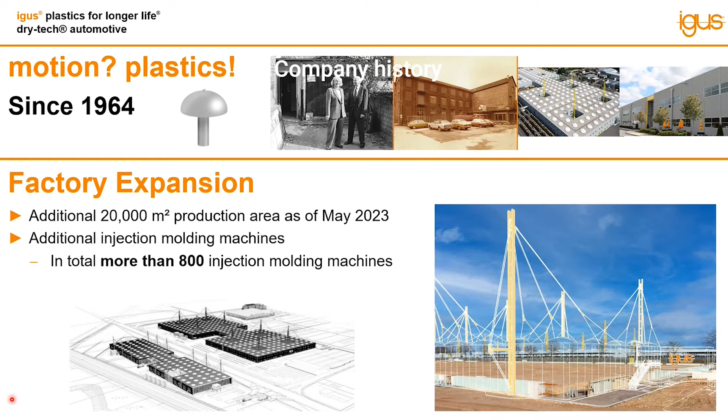Coming from one product we saw on the other slide to many more products in our portfolio, we also offer a lot of cable carriers, and assembled carriers with the cables already included to make it fast and easy.

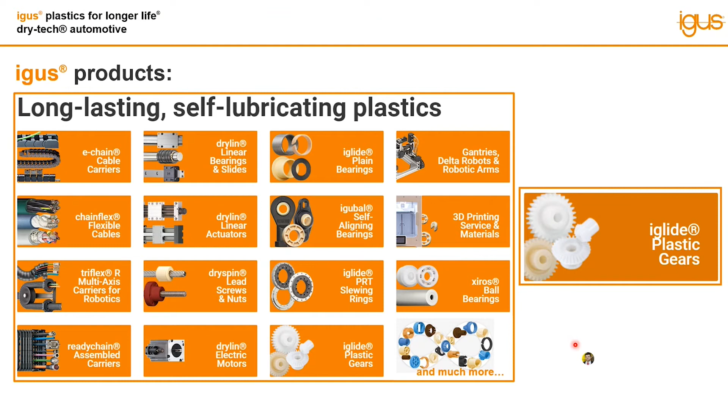And today we will talk mainly about our iglide plastic gears. So what is iglide? Iglide is the material behind all our components, and that's the core technology of igus.

We develop our own tribo polymers. We have over 50 different materials in the catalog we are using, and even more, like over 300 materials, for specific applications with slightly different parameters and characteristics, especially focusing on having answers for the specific application.

So what is inside? Usually we have a base polymer defining the temperature and water absorption as basic parameters, all of them available on the market that we are using. Then we blend fibers and filaments into it to make it more resistant and stronger, with load carrier opportunities, and then last but not least, solid lubricants to make it self-lubricating.

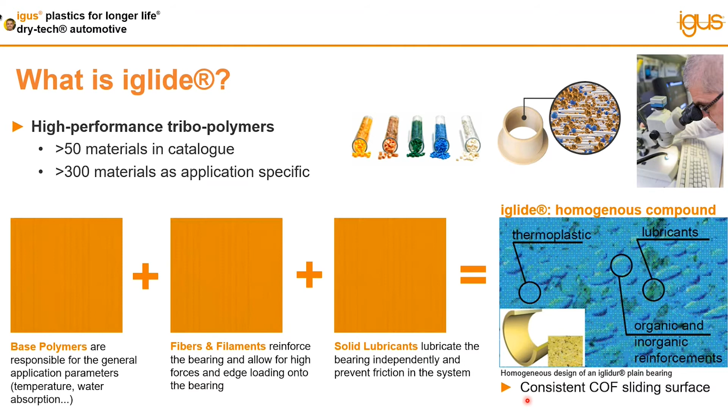All the products we have can run without grease because it's already inside our blended compound materials, as you can see the structure here, always allowing a very low coefficient of friction, a very perfect sliding surface, and very low wear rates for your application.

How do we prove it? That's a big thing for us because we are testing a lot. We are testing all the materials we have, in different shapes and different designs.

Different load scenarios, different speeds, and all of this testing data will go into our online tools. So you can go on our website, fill out the basic parameters, just a couple of data points of the application, and you will get a real recommendation about the best material from igus, cost-wise, but also for service life, to offer you a workable and very good application.

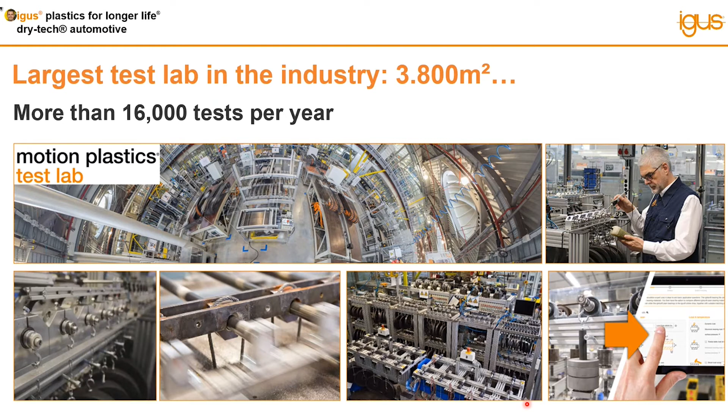And the automotive industry, to give you some confidence, over 1 billion bearing components we produce per year at the company igus, and half of it is going into the automotive industry per year, like 500 million pieces a year we are already successfully delivering into the automotive industry.

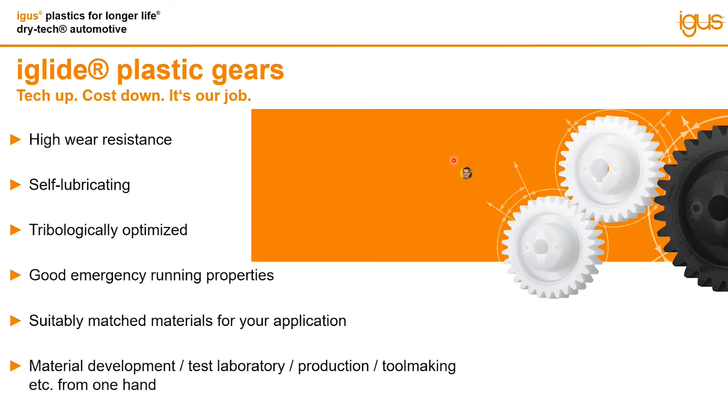This is one target from igus: we want to make all of our materials calculatable for you in different software that we have, and online in our calculating systems.

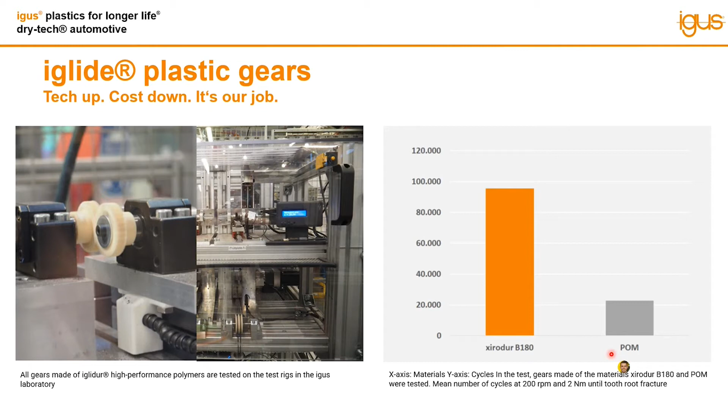This is also an advantage from igus: we are focusing on many branches, so we have a lot of experience and innovation from other branches that we can implement in the automotive industry for you.

This is one very important point at igus - not just the parts we offer, the material, our know-how, but we want to give comprehensive service from one source.

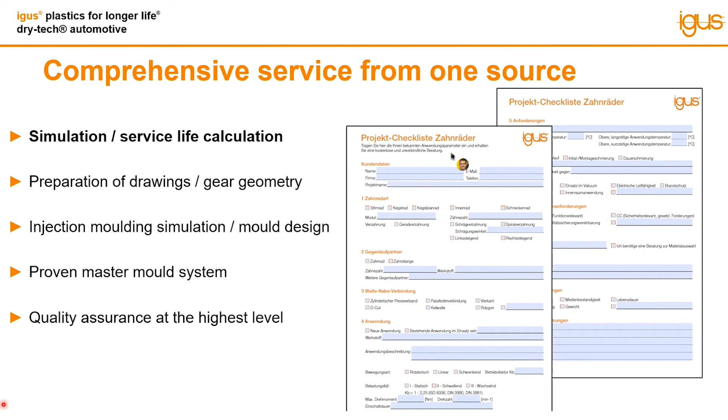So we often begin with a simulation, a service lifetime calculation of your system, your gearbox, your gears. We have a project checklist, a little bit like an APQP, where you put in all your data. Regarding your needs and parameters in the application, we will find the right material for you - this is often the first stage of the project, and this is how a project can start.

People dealing with gears daily in their business know KISSsoft. This is a very important state-of-the-art software that we also use at igus to calculate the gears, to optimize the geometry of the tooth, and to give you a service lifetime calculation for your application - very important at the beginning of a project. This gives direction on which material to use, how long the lifetime is, and what should be optimized, and we provide service regarding all these points.

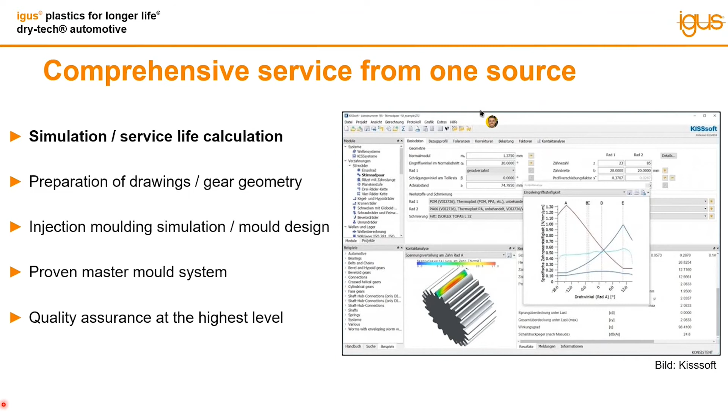One very nice and important point is that from mid-2022, the first iglidur materials will be available in the KISSsoft software, so that if you use KISSsoft in-house, you can directly calculate the first iglidur materials in KISSsoft. This will also come this summer.

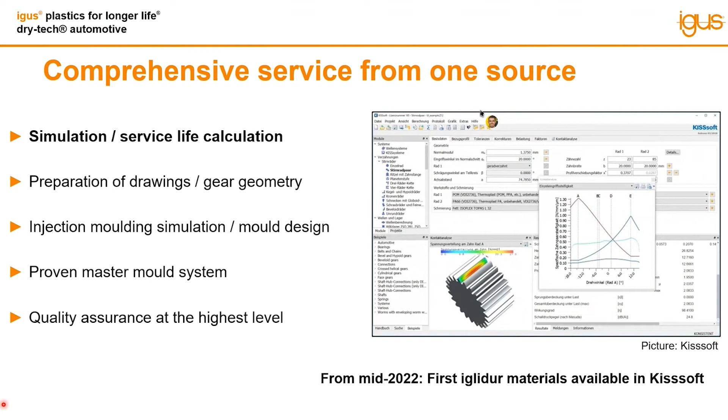After defining the first steps in the project - simulation, modification - this is a good example that we are also your partner regarding the geometry of the parts. We often get a simplified tooth or gear geometry from CAD systems, as you can see here, which doesn't match the norm. As a partner, we will find the right geometry with you, implement the dimensions on the drawing, so that we have the right thermal calculation beside the dimensional calculation in your system. This avoids sticking and allows us to make correction loops the right way, so that everything matches the norm.

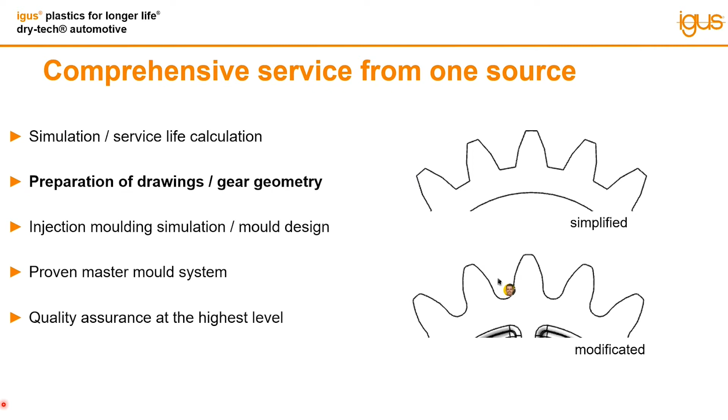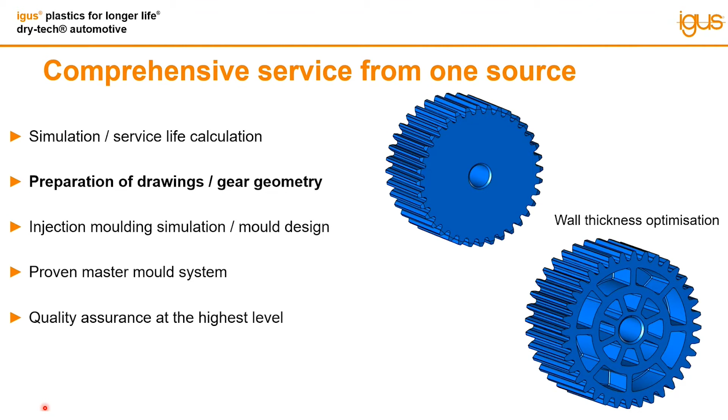Another important point: sometimes we get requests like this - a very high thickness part. It's not just about the teeth or tooth itself, it's about optimizing the whole material regarding injection molding. This is very important at the beginning of the project, because at the end we just want to start prototyping with the serial geometry - we don't want to change the geometry during the project. So we really take care to consult on optimizing the wall thickness, so you have a really good part geometry from the beginning of the project, even if we start with prototypes made out of SLS, bar stocks, or whatever.

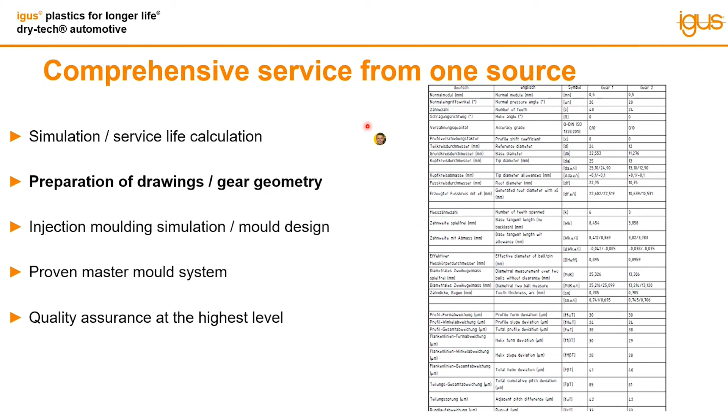As I said before, we define all the important measurements needed to define a drawing, a gear geometry, on the drawing. We have an internal norm table where you can find the root diameter, tip diameter, all the references and dimensions to define a gear and also perform quality assurance. All this is implemented in our drawings automatically, so you have all the details you need at a glance.

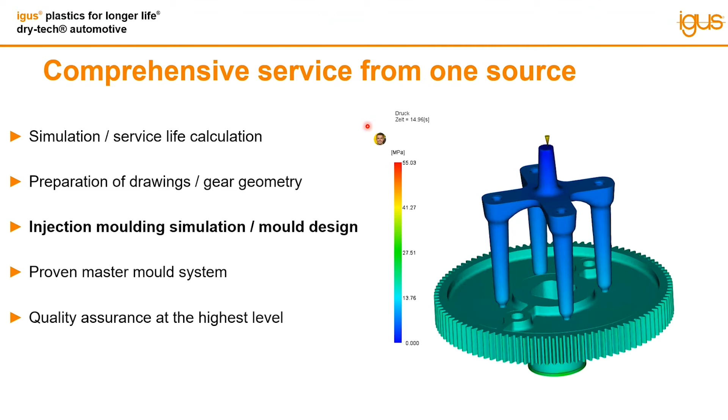Before we go into the steel phase, before we build prototype or serial molds, we take a deeper look into the process itself, for example with mold flow analysis, so you can see how the part behaves in the tool. This helps optimize the part, the gate mark, or the periphery of the tool, to have the best process for your serial parts, because quality is a very big topic in the automotive branch. Here's another view into the mold flow, which is what we can do to calculate the parts from the production side.

When it comes to mold making, going to the steel phase after simulation, we make this in our in-house tool shop, so we have very short ways. We can make the tools and correction loops in-house, and sample the parts directly on our sampling injection molding machines right next to our tool shop. So very short ways, a very short lead time. This is our target, because lead time is more and more important in times like this.

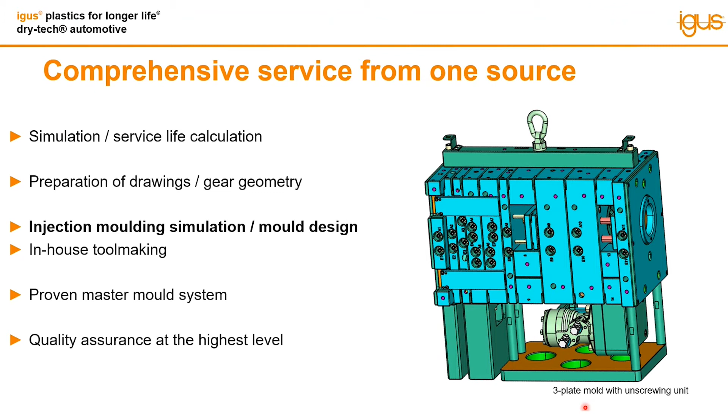We have the sampling process in our in-house technical center, so we have machines where we can take a deeper look into the process. We build the mold, we have the first off-tool parts, and after every correction loop we sample the tools very individually and take a detailed look into the process, so we have a stable process in serial production for you.

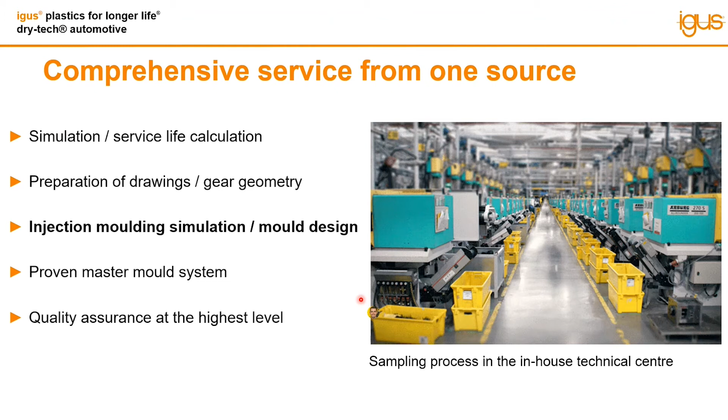Besides standalone, very complicated tools that we need for some projects, we have our proven master mold system, also a 3-plate system in this case. The part I hold in my hand is a module of 1 with 50 teeth, produced with the tool you see here. This is also our target: if we can put your part, your geometry, into our injection molding master mold system, we will lower the tool costs and give you the best suitable service regarding the tooling side and the costs, not just the part price, to keep costs low overall, including the tooling.

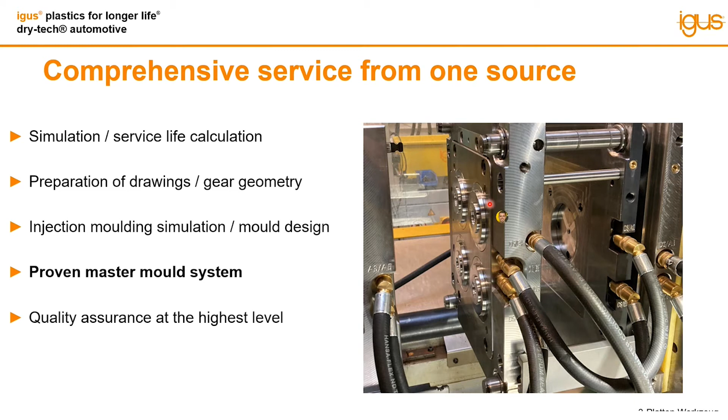One very important, high priority point from the beginning of the project is quality assurance, which at igus is at the highest level, often beginning with CT scanners. Once we've molded the parts, we're able to measure every point on the part, so we can make individual correction loops for the tool. We can take a deeper look at every side, every point of the part, to make correction loops very individually for serial production.

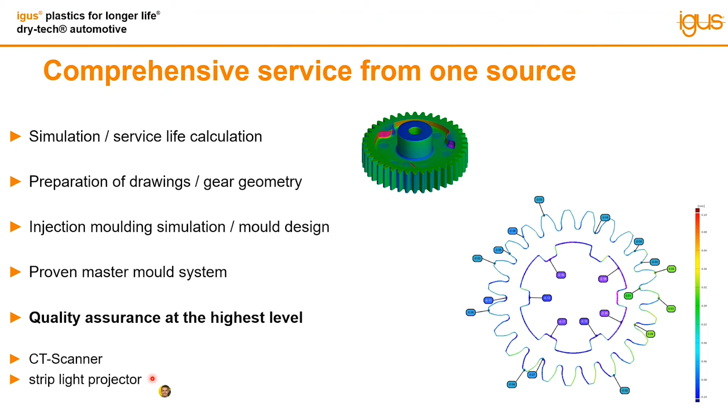At the end, if we have overmolded parts, like metal parts put into the parts, we cannot use a CT scanner. In this case, we have the strip light projector, so we can measure parts with overmolded metal parts. You know these pictures when dealing with gears -- we make the tactile profile tooth checking for you and provide the protocol. This is very important for the PPAP phase, to put all those measurements into the PPAP so you have the whole quality assurance integrated into the well-known automotive standards.

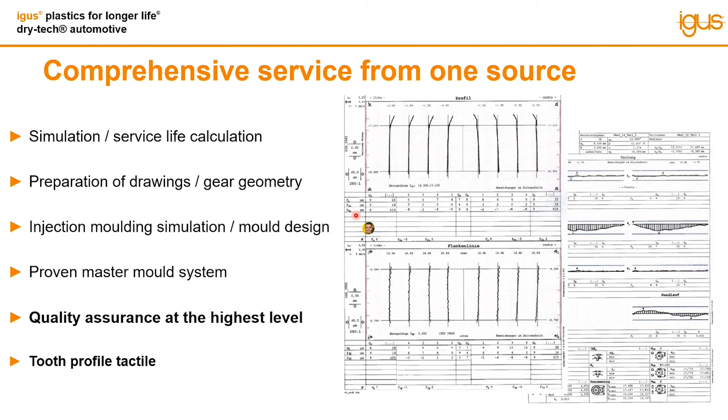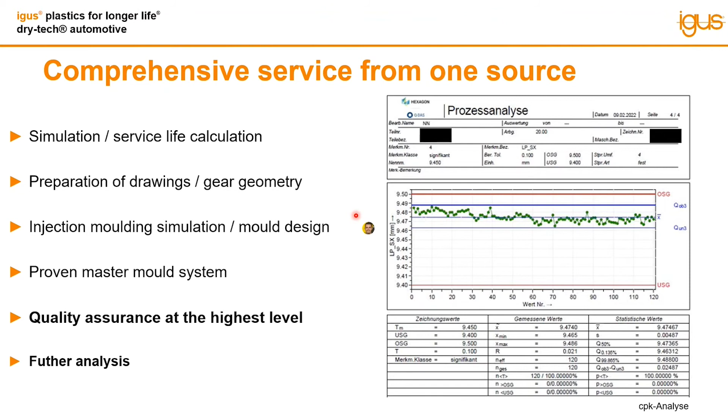Other analysis that we make in-house, like CPK analysis or other points, are also possible. We can define all those points together with you regarding your needs in the project. If there are special measurements on the drawing that need to be checked individually, we can define this together with you. Our manufacturing capabilities are everything from one hand, one source, so you don't have to talk to different parties. igus will be your partner from the beginning on.

We often start with additive manufacturing, which can be FDM, but most often, in over 90% of cases, we use SLS printing for modules down to 0.5, and now our new DLP printers, where we can print very small modules below 0.5 modules.

The possible second step is mechanical processing. We have a lot of materials also used for injection molding, available as bar stock, extruded materials, plates, so we can machine the parts if you want. From my experience, this is very often used in the second stage, alongside injection molding prototypes, so we have prototypes that are serial-near produced.

For aluminium tools right now, lead times are around 6 to 7 weeks. The aluminium tools have metal inserts so we can have a nice tooth quality in this case, which is really near or at serial quality stages, so you don't have a loss of quality.

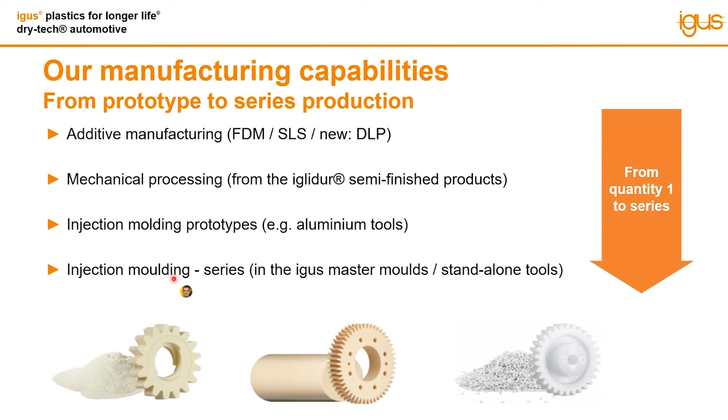Just to show some application samples - I'm sorry I cannot show many parts here because we have non-disclosure agreements with our customers, which we of course respect.

One nice application - I showed the tool before - is this electric rear seat adjustment for the Chinese market, with a helical worm gear with an internal thread. A very complex part with a very complex tool technique, and in this case with low fogging properties needed, fire class for the automotive interior, and very importantly, low noise, since we're in the interior, plus very nice emergency running properties.

So this helps us a lot in the interior area - all the advantages that we have from our materials in this case.

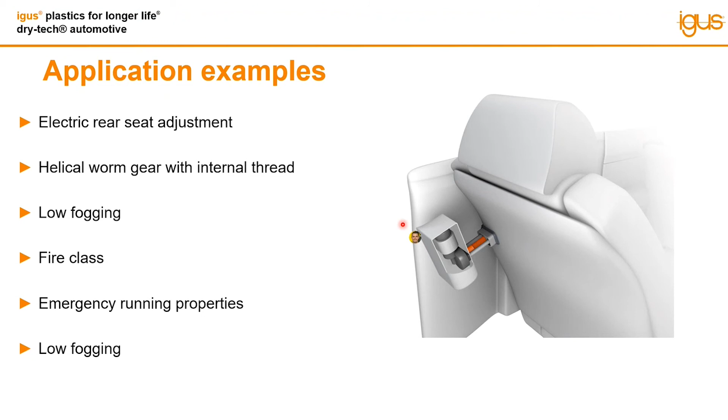We also build our own gears internally, and I have some parts to show you. Here's a very small part with a module of 0.4, and here a module of 1. We are able to mold parts in very small modules - we're also producing modules of 0.3 in injection molding tools for the automotive industry.

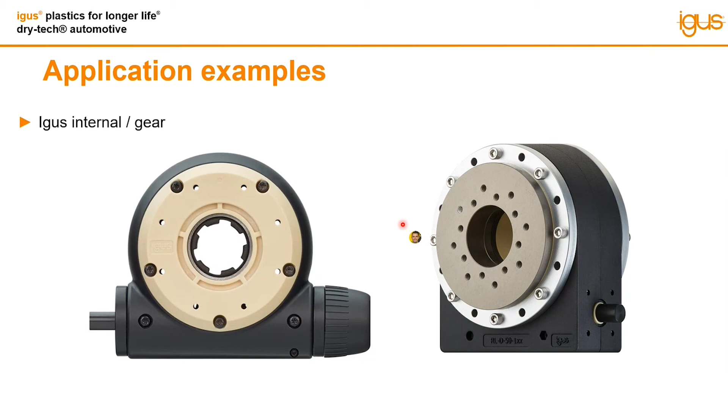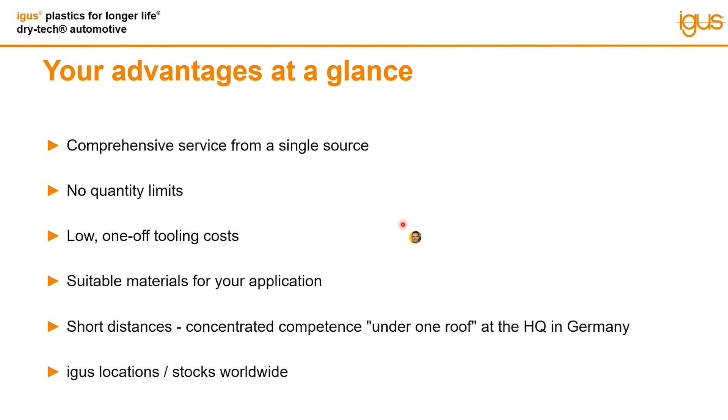And now, just handing over to Sebastian. Many thanks for your attention, and looking forward to hearing something regarding quality and also the igus service.

Thank you very much, Stefan, for the insights on the gears and especially the technical information, which is definitely required for the gear topic. That's where we are, and that's what we want to offer our customers. Thank you very much, and let's take a deeper look into the quality and service from us.

We are certified based on all the quality norms like ISO 9001, the automotive norm IATF 16949, but also environmental norms like ISO 14001. For all the materials we use, we have standards like burning rates, fogging rates, cleanliness certificates, or REACH, GADSL, or IMDS.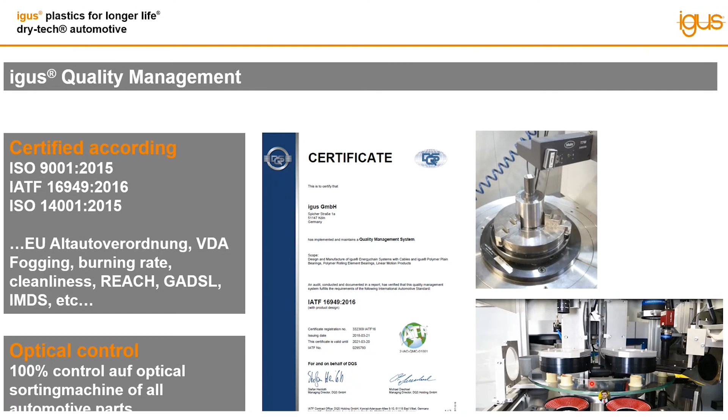Another big thing for quality is that all parts are checked before sending out. You can see here on this bottom right picture our optical sorting machine with camera systems on the top, bottom, and side, where the parts go over a plate and are checked if any damage or anything is occurring. They are checked 100%, meaning only good parts will come into your facility.

Stefan already mentioned global standards - same company in 35 subsidiaries, always igus, always technical support, always one company. We also have partners in more than 55 additional countries who carry our products in stock and can support you with direct deliveries wherever you need it in the world.

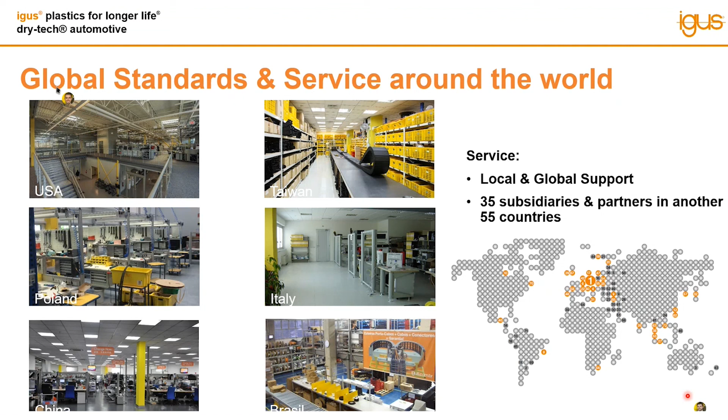Another great thing we can do is give you a customized sample. As Stefan mentioned, 3D printing is a big thing - we have printers in the US, SLS and FDM. So if you want a customized sample, send us your step file and we'll be happy to send you a gear sample.

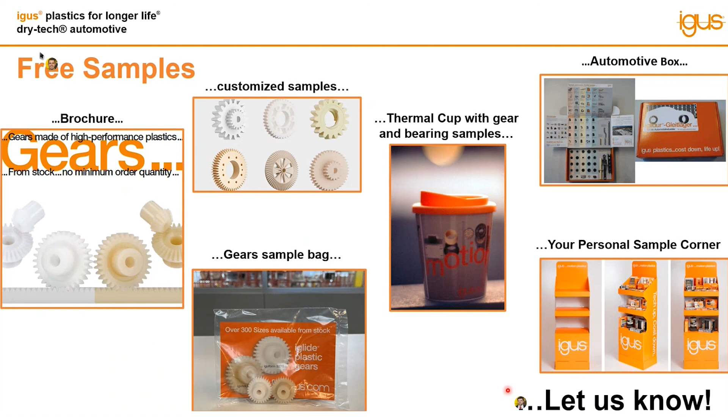You can see it here - we can put a lot of different samples inside, catalogs, brochures, samples themselves to give over to you, put in your engineering department, and share with your colleagues, take out whatever you need. We will definitely refill it, and hopefully you can spark some ideas based on those samples.